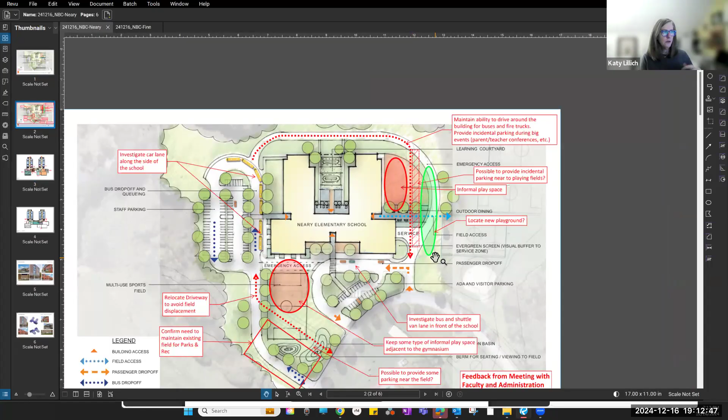For example, we are now showing more information about the back of house space. I had a wonderful conversation with Keith talking about how that would best function, and the arrangement of spaces. So back to this site plan, you would see the deliveries would come in on the right-hand side of the building. This also keeps it out of the flow of traffic of buses or cars for drop-off.

So back of house spaces are shown in a little bit more detail. We heard in the meeting this past Thursday, and as observed in a building tour of another school, that we're going to raise the music rooms. The 3 music rooms will be at the same level as the stage, making it really easy for moving instruments and things back and forth to the stage.

And in the arrangement we're working on as the next refinement, you will have direct access to the stage, so you could use it effectively as sort of a green room for performances.

We have also shown more information about the layout of the administrative offices. This rotated slightly on the plan in order to create a more generous entryway and entry plaza at the main entry to the school. We are showing the nurse's office here.

This was a desirable location for its access to the gym. We understand the nurse probably has a lot of need to be next to the gym, and also access to the administration - that's often something people want, with a pass-through door to the administrative area, as well as easy access to the side entry in case a student needs to be picked up during the day.

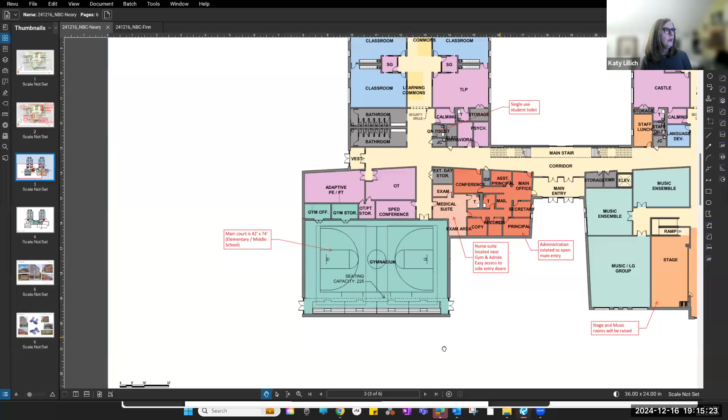Going to the second floor, probably an interesting thing of note, we have moved most of the mechanical and electrical spaces to the second floor. We had extensive conversations with our consultants and they are fine with this. The only thing necessary on the first floor is the sprinkler room, which has to be accessed from grade and from the exterior.

What this allowed us to do was compress the footprint even more. We had a lot of spaces that really needed to be on the first floor; these spaces can now be on the second floor. I talked about this with Keith and didn't hear any resounding reasons not to do it, so I think that's a good change for reducing our footprint a bit.

Also, you're seeing here we have some staff toilets sprinkled around. We talked about putting these in strategic locations so that whatever floor you're on, you're either going up or going over. On the second floor we have one here - I'll go back to the first floor and show you the location of those.

We have also included a second art room as part of this conversation. Greg, do you want to give some background? Sure - we've looked at our potential scheduling closely, and although we could operate with a single art room, I think it's more feasible to have 2, because most likely we'll have 2 art teachers. This allows some flexibility in scheduling for a school of this size.

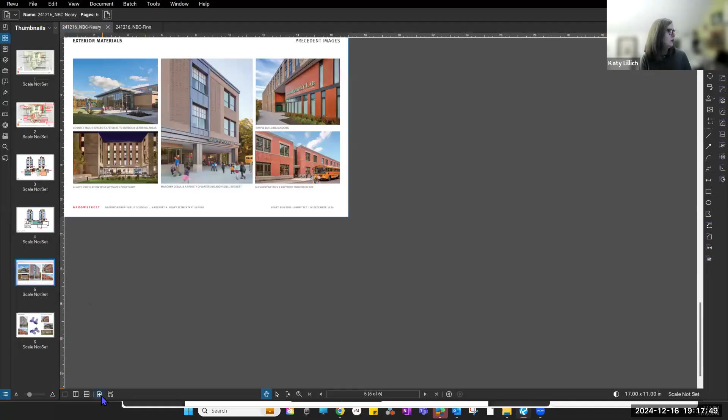Skipping back to the exterior, we had a conversation about exterior materials. It's our feeling, and we discussed this with the educators, that the exterior materials should be masonry. There are a lot of different colors, sizes, styles, and textures, but the reason for this is that it's a very durable material with good longevity - we're designing for a 50-year building - and it's also very cost effective, probably the most cost effective exterior material at this point.

Here you see a few examples of some of our inspirational images at this point. These are obviously not our building, but you'll see what we're planning for is largely a masonry building - maybe 85% masonry, though I'm not sure the exact number yet. For the sake of our estimate, we'll have largely masonry and then some other materials to add a little bit of interest.

So in this case, it's a composite metal. In this instance, we're showing a Trespa type material, but likely something like composite metal. It also comes in a huge variety of colors.

We're showing a few images here with the courtyard inspiration, as far as having a glazed courtyard entry on the lowest floor, looking out into that courtyard and beyond to the natural landscape. And here you'll see an image of the massing of the building as it currently stands, and calling out where

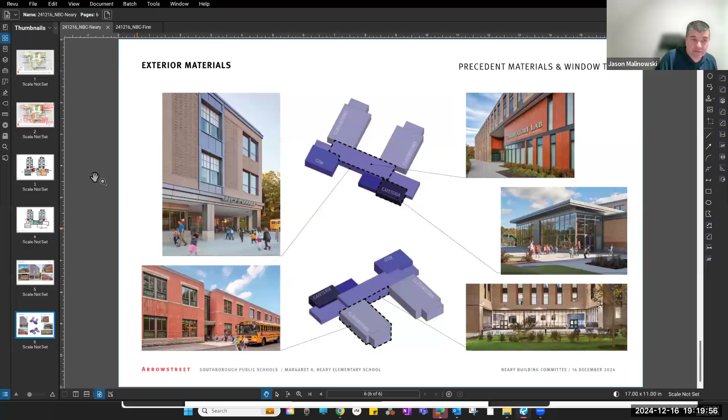Yeah, I think before we go to questions, other than just some general input, are there any requests of your group tonight for decisions, guidance? We want to make sure that everyone is on board with a few of these decisions that we've made, especially related to...

We were going to ask about the additional toilets. We have since clarified with our code consultant that right now we are meeting the code, and I think we have one extra toilet, so it isn't really a question of anything additional at this point.

We want to make sure that you're okay with the gym design as we have shown it. We would like to make sure that masonry, just in general, is acceptable to the building committee. I think those are the main, and the site plan, that there aren't any concerns, that we can proceed, at least for the sake of our estimate.

All right, so for purposes of directing the conversation, I'll just have you stay here for a second. We'll go back to the site plan after, and then we'll go forward to the masonry.

So on this, first item of discussion is around the art room. So it sounds like that is potentially incremental square footage. That's right, it's an additional room of 1,000 square feet. Okay, that wasn't reflected in the past square footage, the space summary.

And is that MSBA reimbursable or not, or to be determined? It is reimbursable. It was allowed in the initial plan, but from the conversations, it sounded like at that point that it wasn't desired to have. Greg and his team have now looked at staffing it and scheduling it and feel that it is necessary. So it is part of the MSBA reimbursable.

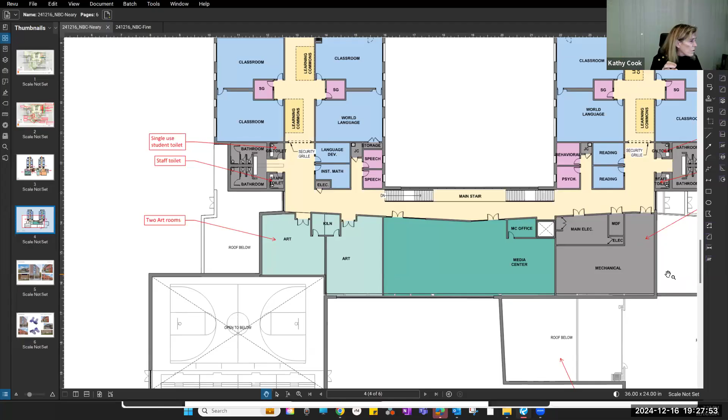Katy, what is our square footage of the project at this point? You said 89, I thought it was 99,564. I'm sorry, I was going from memory. If I can stop sharing for a moment, I can pull up the spreadsheet. You have it? Okay, it's great. 99,564, that's right.

Just to be clear, say it one more time: we have not changed that 99,564 at all except for what we're talking about tonight, possibly doing with the art room. The gymnasium that we talked about last meeting is still right now where it was, with the 564. Correct. Okay, and we're still at a 1.5 grossing.

We're currently at 1.5, yes, as we're pushing and pulling. We all know that we will continue to try and refine that and narrow it down as much as possible. Currently, we're tracking right about 1.5.

I just realized one of the things about the mechanical room that I intended to mention. This mechanical room is sized as if we had a geothermal system. That mechanical room is larger than it would be with an air source system. That comes out of the net to gross, so that's not changing the size of the building, but it means we're having to take space somewhere else out of the gross, whether narrower corridors or just making things extremely efficient. So it is not actually adding space, it's part of the net to gross.

But if we decide with the life cycle cost analysis that you want to go with the air source system, we can recoup a little bit of that space out of mechanical and distribute it, or make the building less than 1.5. It could come into that grossing factor. But currently, until we know that, we need to hold the size that would be required for the geothermal system.

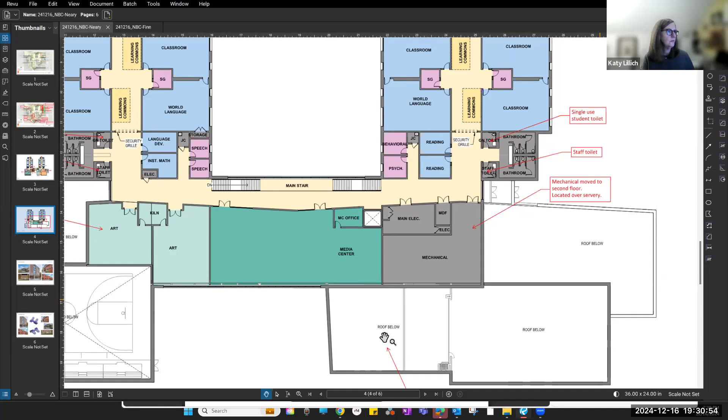And I just plugged the numbers in, so overall it's actually a little less. It's about a 1.1 million increase to the total project cost, and an increase of 750,000 to the town share.

With the other additional toilets and everything, we're staying in the same square footage, but is there any additional estimated cost for that versus whatever other space the square footage would have been used, or are we still in the same ballpark? It's still in the same ballpark, and frankly we have one additional toilet. It's not excessive, and that's because with these single toilets it's hard to put them where they belong without just having one more.

So just to make sure we're all on the same page, Jim, are we still looking at Southborough's share of the cost at 81.8 million? Has that number changed? So yeah, it would be 81.8. Yes.

But we're gonna go through a new cost estimation process in January, February timeframe, right? So let's just say we don't add the art room for 2 seconds. We could still have a change to the 81.8 based on design features that you've included and or changing market conditions, correct? That's correct. That number for projection will definitely shift around.

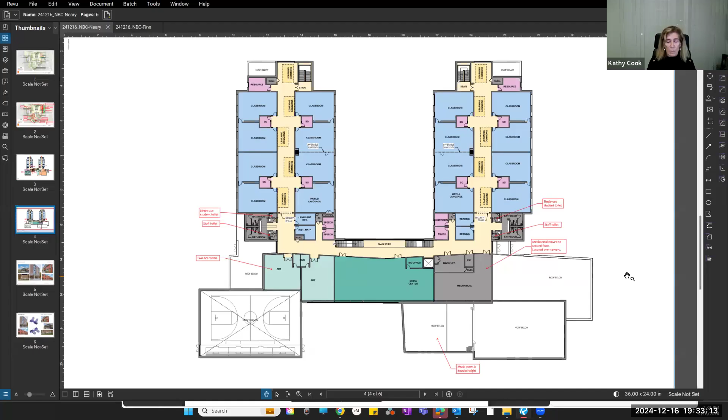Jason, the reason I ask — I know there's other things that could increase. If we do the geothermal, we're still gonna have to finance all of it up front and hope we get the reimbursement from the government two or three years down the road, so that's gonna increase that bond also. So I understand all that, but right now nothing's changed, that 81.8 number, and that's what Jim said, so that's all I wanted to make sure of. So I'm just trusting and verifying.

Okay, so no decision on the art room tonight. We'll come ready to make it in January. I think the committee would benefit from a space needs summary. I would ask if committee members have questions on the educational benefit that they reach out to Greg or Stephanie between now and then, if there's anything additional they would like them to bring or have discussed with the educators that would be using the space.

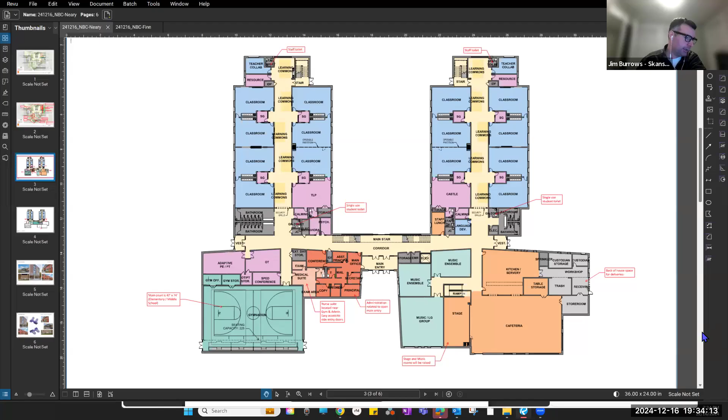So just to clarify, because I'm doing the math on the fly here — when we got the additional 586 for the cost per square foot, and then the site work increase, the town share actually came down to 81.1. When I plug this in for the additional 1,000 square foot for the art room, it's 81.8. So we're basically just making up what we saved with that 586 adjustment in funding.

Jim, the slide you sent me a week and a half to two weeks ago, before the art room, says 81.8. That's the slide — that's why I asked you to send it, to make sure I had the right slide. So you say 81.8 on that slide, and that's what you showed us. Okay, I'll clarify that quickly before tomorrow night, so we're all on the same page as far as what we think Southborough's bond is going to be. We know it's going to change, but we at least have to have a number right now that we're working with.

Roger, do you have a question on the art room? Really quickly about the art room.

The way you've just explained it, Jim, before the art room and the 586, whenever the reduction was there, it was 81.8. You changed something around which dropped it to 81.1, but the art room has put it back up to 81.8. There was a decrease and an increase, it just happens to come out to the same number we already had.

Is that fair? Yeah, I need to spend a bit of time with this. I've oversimplified it, but essentially, yeah, that's what I'm seeing right now. I'll clarify that.

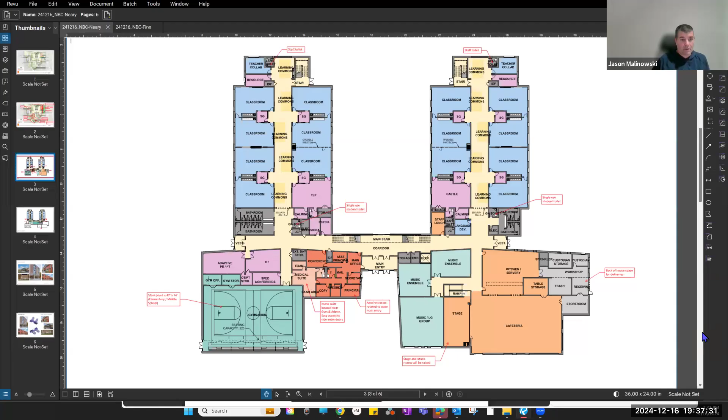All right, so on the gym, just to make sure everyone's on the same page — Jim or Katy, I'm talking about the gym, G-Y-M, not Jim, J-I-M. You listened to the feedback at the last meeting about what the community was looking at. You went back and feel like within the originally allocated space, depending on how you lay it out, you'll be able to get bleachers accommodating greater than 200 people and have 2 smaller courts on top of 1 larger court, so there's the ability to use this for elementary school age children from kindergarten, 1st, 2nd grade, up to the older group that would use a full court, without increasing the square footage allowed by the MSBA and what we currently have carried — accomplishing what everyone wanted.

That is correct. The court is a middle school/elementary school size, 42 by 74. The cross courts will not be regulation size, but they can be practice court size. They're shown here in a gray line, showing where the bleachers would be pulled in — that's what's able to achieve that. So we're assuming the bleachers are fully extended only for large events on the main court. The bleachers will still be there, but you can't pull them out all the way on a practice day, and the size remains as it was designed.

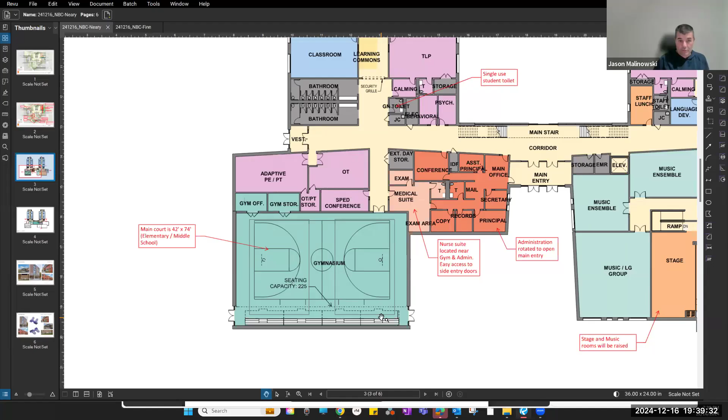Greg, has your physical education group weighed in on this? And will this space be appropriate for conducting 1 or 2 PE classes at the same time? Yes, and I think we've discussed having a center curtain so the gym could be used as 2 spaces if needed. So yes, we have discussed this and sought input from the PE educators.

Okay, so are there questions from the committee on this?

Kathy? My memory may be wrong, but I thought when we talked about this last meeting, the concern was not the needs during the school day, but the ability to allow the various leagues to use this court after hours and on weekends. We wanted to provide more space than we currently have. I thought the needs of the school itself were already met with what we had in place last meeting, and that the request to increase the size by 2,000 or so square feet was to accommodate the outside groups that need space also after school and on weekends.

You are correct, but remember the requests that came through the public forums were for more practice space that could be divided, as well as a full-size court. So we can take it back to the user groups that submitted it, but to me, you are providing a full-size court for games with bleachers and two practice courts. You have none of that right now at Neary, because you can't use that space off hours—it's not conducive to anything outside of PE classes. So I think you're adding space to allow them to use it. Just my two cents, hearing the requests from the open forum and what our consultants are now telling us.

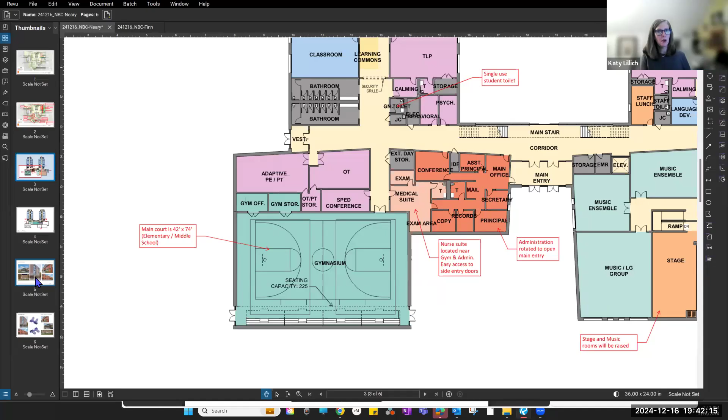All right, so that was the gym. I think we answered questions on the plumbing fixture. There's nothing else in this, correct? Nothing else within the school. The last thing was proceeding with masonry as our basis of design for the purpose of the cost estimate.

So what we were describing is roughly, off the cuff, 85% masonry and 15% some other material such as composite metal, similar to this inset image, which gives it a little relief on the exterior. We would use that in focused areas, probably at the entries, something along those lines.

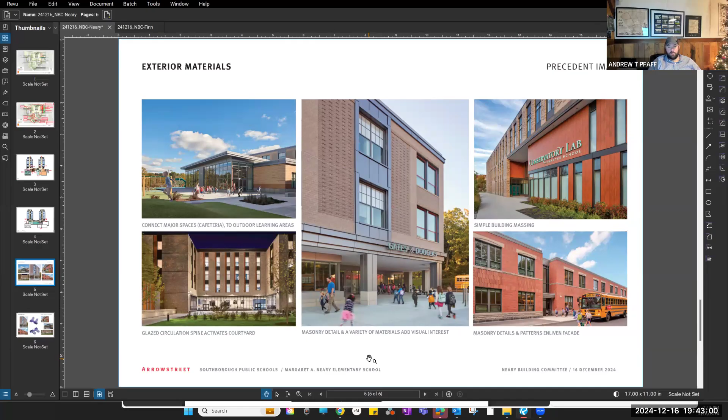Any thoughts to the contrary on that particular piece? Is there any desire to make it look like Trottier from a campus perspective, or does it not really matter to you, Greg? I'm indifferent, but from my design expertise, there's not really a line of sight between the two, so I think it would be nice to have some individuality between the two buildings. But just having the common masonry—two masonry buildings—might be the connection.

Kathy? So Katy, this is not my area as far as the choices here. Are you asking for guidance tonight as far as what to pick? And are you recommending one that you believe is cost effective, and is that why you're recommending this?

These are precedent images just to give you an idea of the fact that there are many different types of masonry, colors, and patterns we can continue to explore. We simply want to make sure the committee is okay with masonry as a concept. There are other materials out there we could choose, but we feel that for cost effectiveness and durability—and it's notable that most of your schools are masonry, so it's common as far as a campus feel—we would like the nod to proceed with masonry for the sake of our cost estimate. What else would you use?

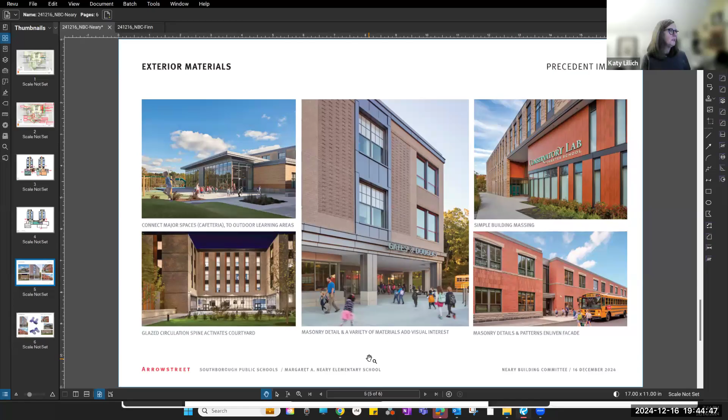You can see this image is a material called Trespa—it's a different sort of compressed and formed, man-made material. You could use terracotta, but that's very expensive. Again, for durability and cost, we feel masonry is your best bet.

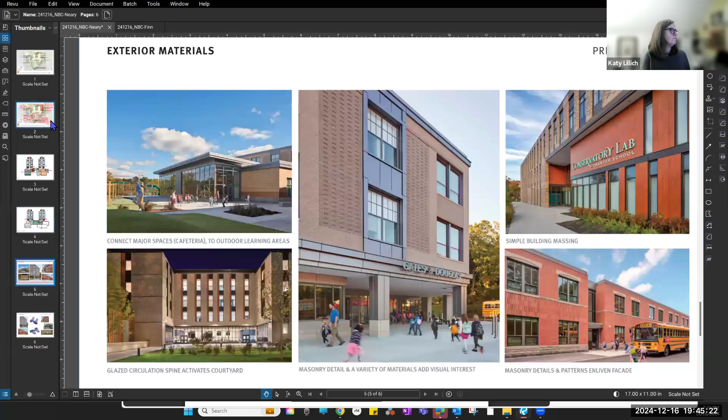All right, I'm seeing no additional hands on that topic. I think we should go back to the site plan for a second, Katy. Okay, do you want the one with the comments or without? Yeah, that's fine for now.

So DePietri Field is what we call that field right out front—at least in the diagram. I realize you caveated that you've learned more about it through your meetings, but your intention was to flip the field to create better access, and you've now learned that it's a relatively new field currently being utilized. My question, which came up when the schools were in front of Capital on their capital plan, is does the way you orient this change the usability of that field during construction?

That field is not used by the schools during the school day, but it's heavily used for youth sports on the weekend. When recreation met with Capital, they talked about a strong desire to keep this field open during construction, realizing it would be close to a construction zone. Does the way you orient this field impact its usability during that two-year timeframe? I don't think this is a gating issue, but it's a question I felt was important to resolve now, especially given potential changes.

I believe the field would not be affected. This will come up in the phasing with the contractor, but it would be fenced off so that the field itself would be usable throughout the duration.

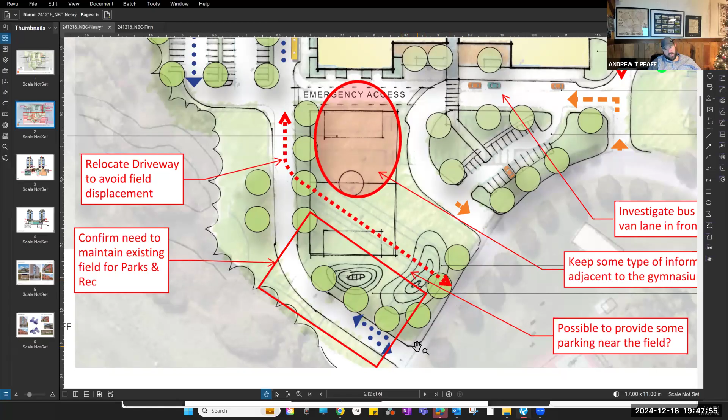Where is DePietri Field on this, can you point to it? Right, this field here. Could you add some parking to the left, in between those four trees where the driveway comes in on the drawing now? I think we wouldn't come down the dotted line just after the field, to the left, over here.

That is currently backing into the wetlands, so you also don't want to build any more parking. We would just preserve what's already there, not tear it up until the last phase of the project. Mostly, you don't want to spend money building a parking lot that's only temporary. That would be my recommendation at any rate.

There is existing parking. What part of the parking are you going to keep, is that what you're asking? We could put up a construction fence and strike a line so that during demolition and the early phases of removing the existing school, some portion of that parking could just be fenced off to maintain it for the fields. At some point it would have to go away so the new road could be built, but there could be a period where you maintain some of that parking if the parking across the street wasn't enough.

Being that we're going the CM at-risk route, if it's known right out of the gate that this field needs to be used, we'd just plan the logistics around it. I don't think it's a big ask. We're not on a super tight urban site, there's plenty of laydown area for them. So it's definitely something we can pre-plan for as we work through the logistics with the CM.

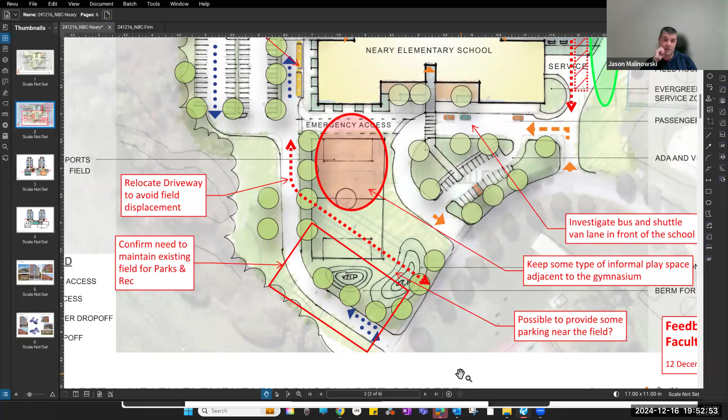Okay, Katy, can you zoom out for a second? Kathy, where you're talking about is on the right side here. Over there. Okay, here. Sorry, yeah, this is - I know it's an idiotic question, but I'm so confused where this is.

Okay, now I got it. So Mark, appreciate your concern on that. So I think what you're saying is you obviously have concerns with the existing location. But does the orientation here that they're moving away from - are you still concerned about that because of its relative proximity?

Well, if the field's going to remain, we really need to sit down with our consulting engineer and determine whether there are any controls that we can put in place to keep people out of the wetlands. Because that's the exposure of the entire site, is that little spot there. And that's where the groundwater surges out of the soil, so we've got standing groundwater in that wetlands.

So if we can come up with some engineering controls to keep the field a field and keep people from going beyond the boundaries of that field, I'm less concerned with it. But it's an exposure I'm not completely comfortable with. I was hoping that was going to be the location of our detention basins. I see them there - they've now got to be moved. So I have some concerns with it.

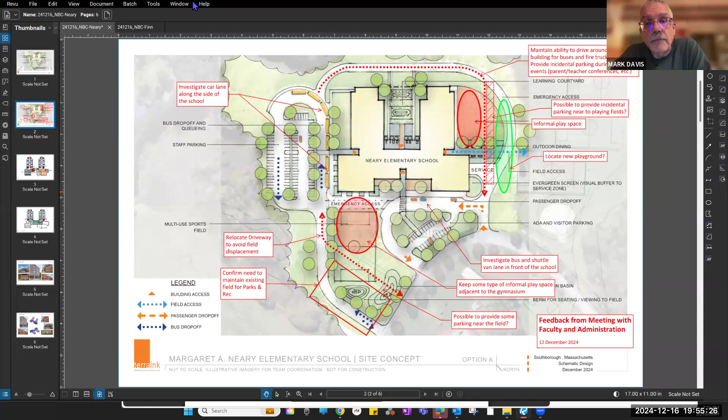Because that's the exposure. So where would you move the field? Right where that red oblong circle is. Suggesting to do what we had sketched. Yeah, that made me happy. There's a road between it and the wetlands - you put a fence along the road and we've gotten rid of the exposure.

Theoretically, it's going to be a couple feet higher than it was, to flatten it out. We've eliminated an exposure that's been there that's concerning. And the detention basins are correctly placed, which in themselves make a barrier.

Is this site plan cost reimbursable? Not that that's the gating issue, but I know that question's coming at some point. If we were to move the field and the school uses it, how does that work?

There's a - go ahead, Jim, you know it best. Yeah, I was gonna say that it all plays into the site cap. So we have our percentage cap for site work, so it would just get into that mix. So if we're increasing that, we'd have to see how the estimate lays out, but we could be increasing our overage of what that site cap reimbursement is. It'd be hard to say right now without the estimate.

All right, so I think we should memorialize Mark's comments and have a thought process around which way you decide to proceed.

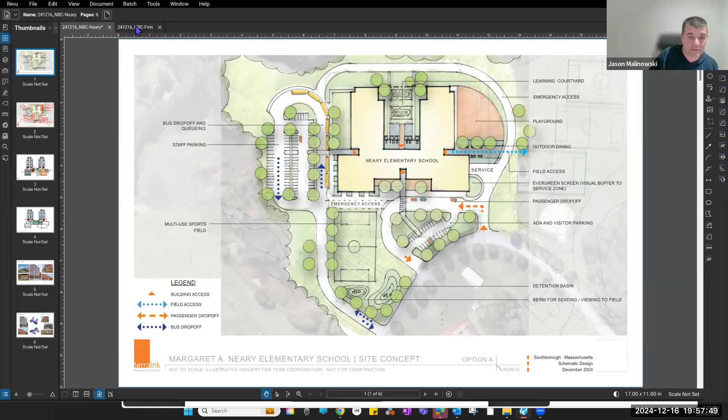One of the things we've referenced at multiple points is that if we were to build a 4-grade school as part of this process, it would certainly negate a future school project at the Finn school when that comes due in, call it a 5 to 10 year time frame. So one of the things we've asked the consultant team to do is outline what items, through their observation, would be needed and how quickly. I caution that it was just a general walkthrough, they weren't even engaged to really do this, but just give some ideas.

I think as we go through this, there's two important distinctions: which of these items would be needed to just maintain the building? If we just were to use this for any municipal purpose other than a school, which of these things will have to be done to keep it habitable and functioning for whatever use we decide to repurpose it, versus what is required of a school?

One of the things we've learned through the Neary process is there's certainly things we would have had to do from a base repair perspective just to bring the building up to code compliance. But then there's the added part that is not as easily quantifiable in terms of how the educators deliver education to the students here.

Where I would like to land after this discussion is making sure there's general agreement on any presentations made from here on out of the items we would have to do to Finn regardless of its use, because that should be part of our overall capital planning. And then what are the incremental items that would be needed for it to be maintained as a school into the future?

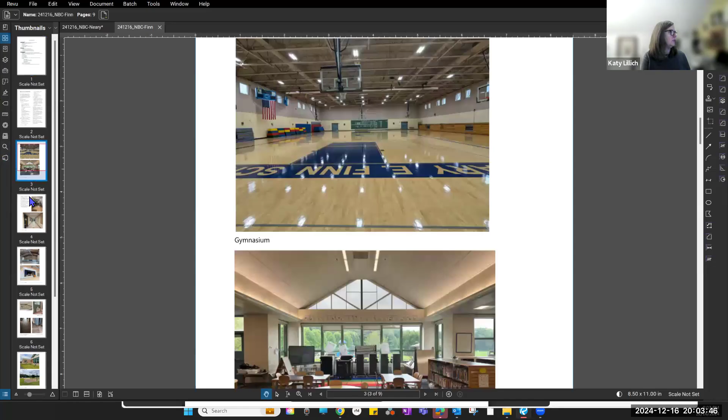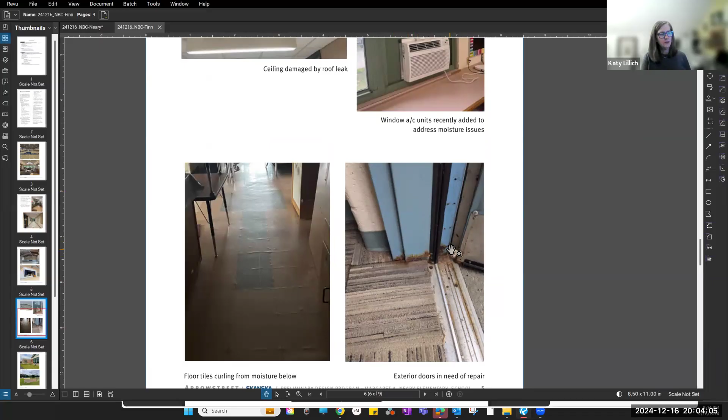I also have some photographs. This was included in our PSR report to the MSBA that was sent out with the package, but there are a series of photos. I feel like this page tells the story quite well as far as the roof leaks. You're seeing here the curling of the floor tile from the moisture coming up. These are the doors that were actually replaced in 2000, but because of that same moisture, it's rusting out the frames.

So there are a series of photos here for understanding the condition of how it is right now. Katy, are you going to be able to take this list and separate it between those that apply to the building regardless of whether it's a school versus, and then those that would apply only if it were to stay open as a school? Put a number beside those and a year beside those so that we know what would have to be spent on Finn for the term of the bond, and it's probably going to have to be a 30-year bond. So we're really looking at it, trying to get to a 30-year projection of what it would cost to maintain this building one way or the other.

That is not something that we are doing as part of this project. It's not part of the scope. Finn was not even listed in the SOI. So what we've done here is more meant to be an overarching summary. We don't have dollar values necessarily to associate with any of these things either. That just wasn't part of our scope for this project.

Let me ask Kathy's question slightly different. So you said roof, which I can tell you that schools has provided capital with a number for the roofs based on a full assessment of that. So we know that. And you're saying moisture, which I realize is like chasing something. So how would you encourage or direct us to try to get an understanding of what that could mean for the school in the short term?

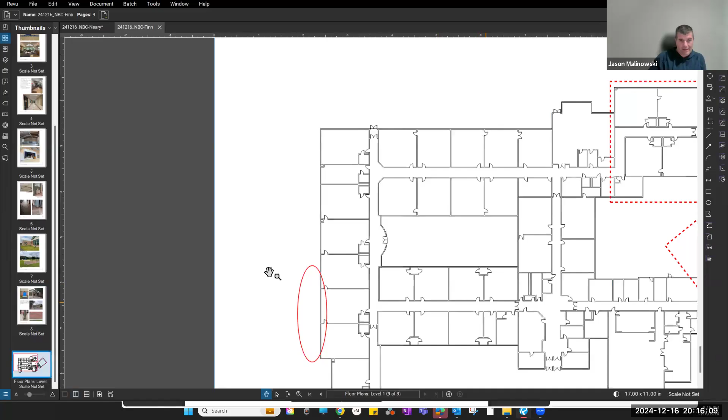Katy, go back to the floor plan, just to make sure we're all talking about what the core part of the building is, because I think that's a good point, Kathy. The red, correct me if I'm wrong, is what was added on back in '98. Is that correct? That's correct.

But the remainder of the building, Keith, correct me if I'm wrong, was updated—windows, flooring—in almost all aspects. The building was modernized during that 1998 renovation.

I'm just trying to expand on Kathy's comment. So if a 4-grade school were to fail and we had to maintain this building for the foreseeable future for pre-K, K, and 1, its exact current use—you're telling me that you wouldn't be coming back to the town for a major renovation here, other than the roof or the ancillary equipment, in a 30-year time frame?

And I realize that's well beyond your time as superintendent, but we're just trying to think ahead and make sure that the town is aware of the impact to the capital plan on both a yes and a no vote. We all know what the yes vote means in terms of the cost to the town if we stick with the numbers we already have. I think the bigger unknown is that if it's a no, what has to be done to maintain it as a school.

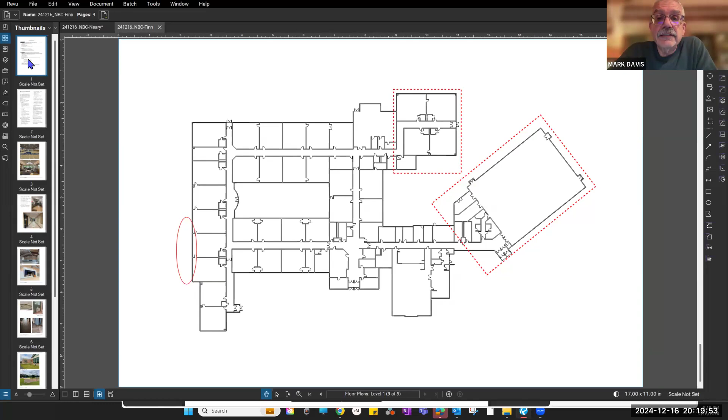Go ahead, Mark. Yeah, in looking at this floor plan, Greg is correct—what was added in '98 is what's circled in red. And the building itself was laid out and worked just as it did in 1965, but everything was upgraded. I mean, the flooring was redone, the walls were all refinished, the ceilings were refinished, new lighting. Essentially, we looked at Finn when it was done in 2000 as just like Woodward—it was a refurbished new school.

Are the existing components holding that building up going to be 93 years old at some point? Yeah, but I'm not sure that's a huge issue. At some point, the town's going to have to look at the septic system because we're nearing that 30-year mark, and I don't even know if it was replaced in '98 or whether it was moved or expanded. But we also had that whole parking lot relaid out.

There was an old house there that was torn down, and we did a lot of work to incorporate all the fields. There was extensive work done, and we all viewed Finn as being really the new school. In order to get from the school out to the fields, you had to walk down a little gravel hill and you were behind somebody's house, and then you got to the fields.

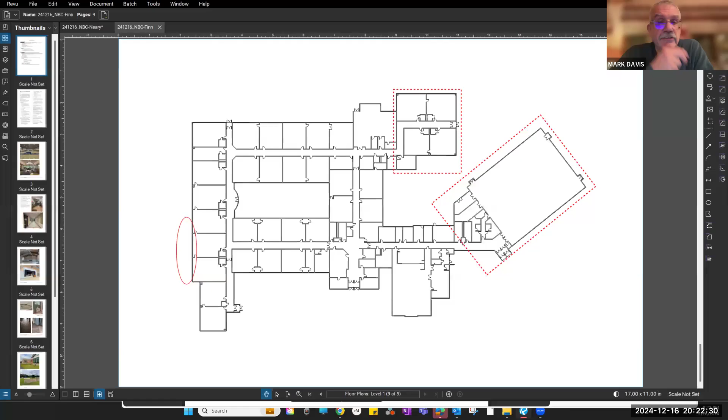Yeah, it'll be an older building. But there's no reason to believe that this structure couldn't continue to operate. It's the moisture, and I would even go so far as to say for the moisture, we really ought to be looking at the perimeter of the building and putting in some intercepts to get that moisture away from the building, and pull it away—that might alleviate quite a bit of the problem too. But I hadn't looked at this floor plan in years, and now I know how the old layout was.

Any other comments on this particular piece?

All right. I've got as many questions as I had. I think it's still kind of a jumble as far as what to do here.

Well, I think, Kathy, I agree, there's certainly questions. I think part of what you're working through and others in terms of how it could be reused—depending upon how it's decided to be reused, that's really going to be an important question here, right? The level of modification, short-term and long-term, to accommodate any user group, I think is really important. To the extent there's significant modifications, I think it totally changes the discussion. If there's very light renovation or no renovation other than the roof and the moisture, I think it becomes a little clearer.

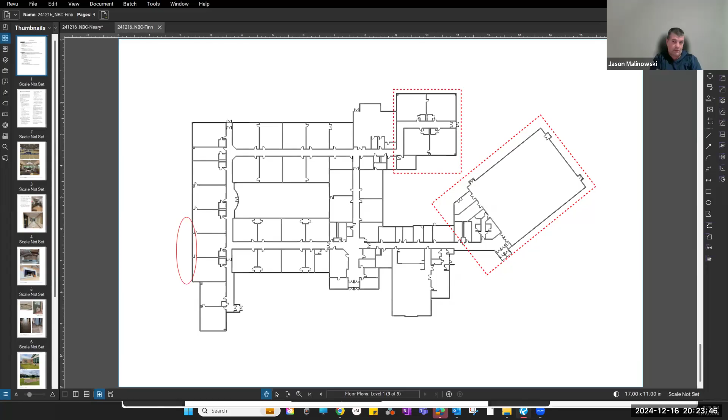All right, shall we go on to preparing for tomorrow night?

So, Kathy, please interrupt me as we go through this, but I think there's two parts to how the Neary portion of the presentation is going to go. Part one is related specifically to the landfill, and you have Bill Cundiff and Tim from PAR coming on that, is that correct? Correct, and that's going to go first. Okay, so unless someone disagrees, I would advocate that Mark be our spokesperson on that particular topic as it comes up, as it relates to this project.

I firmly believe he studied this issue. He was clearly very skeptical of the issue for many, many months, and I think it's important, whether there's public comment on the issue or however you're deciding to conduct this, for Mark to kind of run point on this, unless anyone disagrees.

So we're going to start with that part, Mark. Okay, Tim and Bill will be there at 7, we'll start with that part. The purpose of it is there has been a lot of public comment, as you saw on site, and now it's spreading to the point people are asking, wait a minute, are my kids safe right now? So we want to stay focused, but the point of the whole discussion is to hopefully alleviate some of the concerns and make sure that whoever listens understands what's been done to look at the landfill again, what's been done all along to protect the current school from the landfill, and what other measures are going to be taken with the new project.